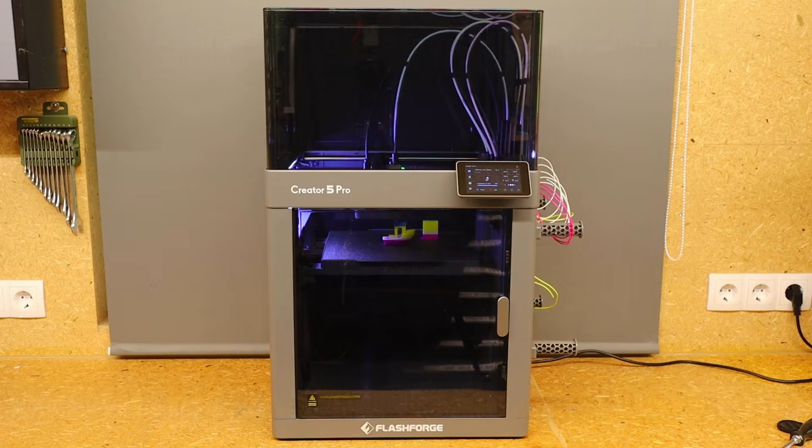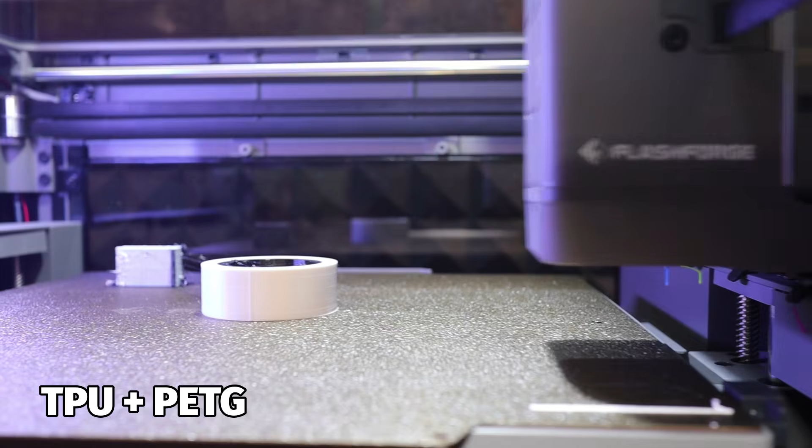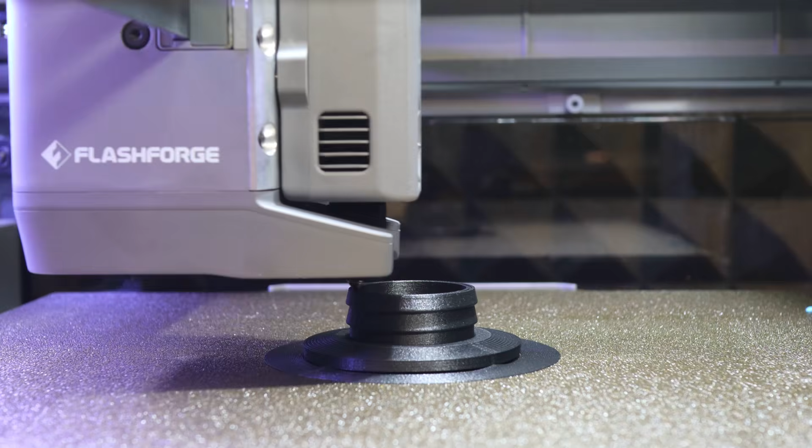The Flashforge Creator 5 Pro offers the perfect conditions for printing challenging technical filaments like nylon or polycarbonate. Its actively heated build chamber, high temperatures, and built-in filtration system, combined with a 4-way tool changer, make it extremely interesting for demanding materials. In this video, I will extensively test if that actually works well in practice for an $849 printer.

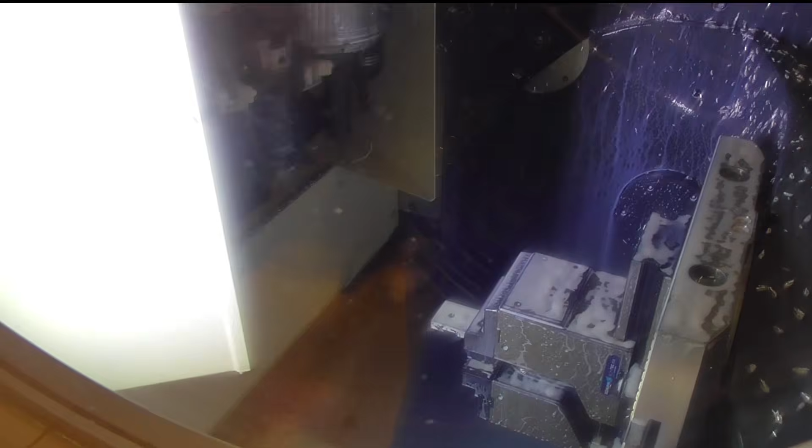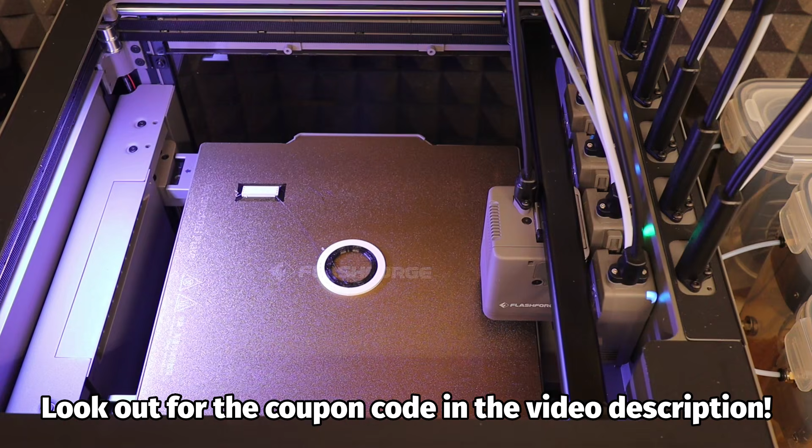I'm a professional CNC technician and I have been using 3D printing since it first appeared on the market. Flashforge saw my videos on developing the open source thermoacoustic Stirling engine. Since I need a tool changer with several nozzles for multi-material printing of engine components and support structures, I'm very glad Flashforge provided me with their new Creator 5 Pro. I'm sharing my honest results here, and Flashforge has no influence over this video.

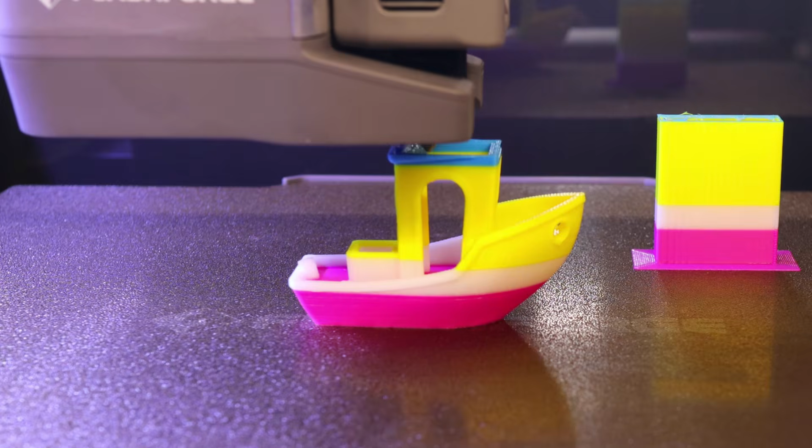Setup and initial startup were very quick and easy. The first multicolor benchy printed with the included PLA immediately showed the best print quality I've ever seen. To be fair, I've never owned a printer in this price range before.

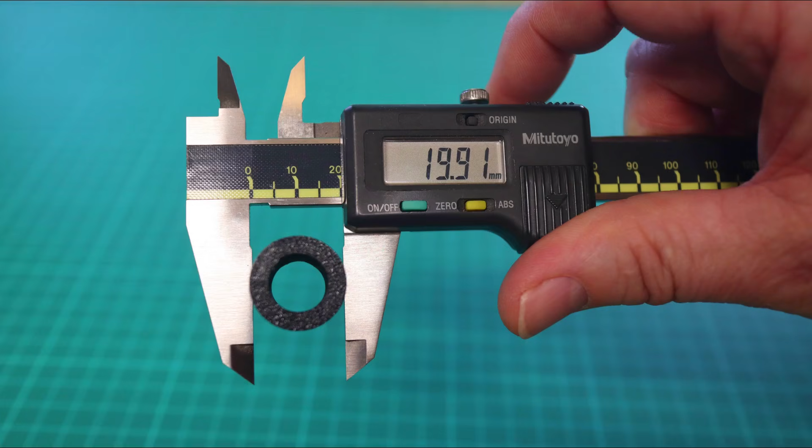Next, I tested printing a 1/4-inch pipe thread cylinder without support structures using PETG. The part turned out great on the first try, without any prior calibration or tweaking. I really wanted to test what the printer can deliver straight out of the box. The dimensional accuracy and print quality are excellent. The thread fits precisely and screws onto a threaded fitting without play and without needing post-processing.

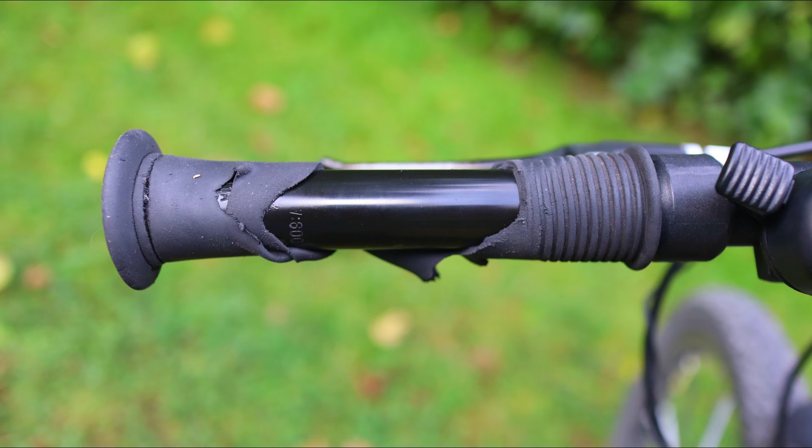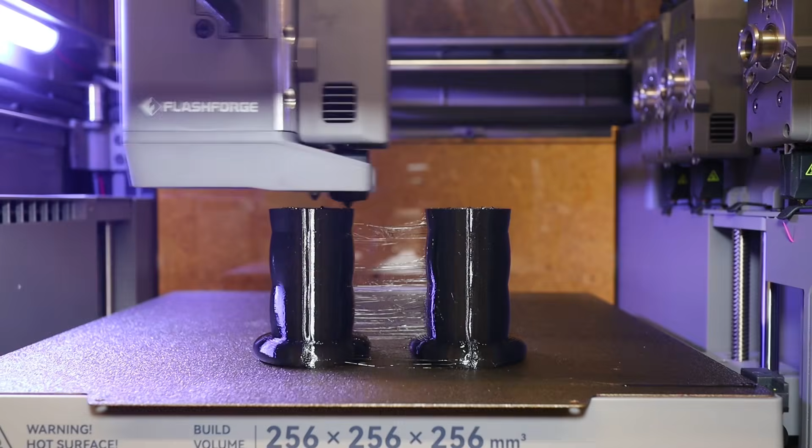My daughter needs new handlebar grips. I designed the grips in FreeCAD and printed them in TPU. The soft TPU feeds into the extruder smoothly, and apart from a little stringing, which is normal for this material, the print ran completely without issues. I think the result speaks for itself, and my daughter is happy.

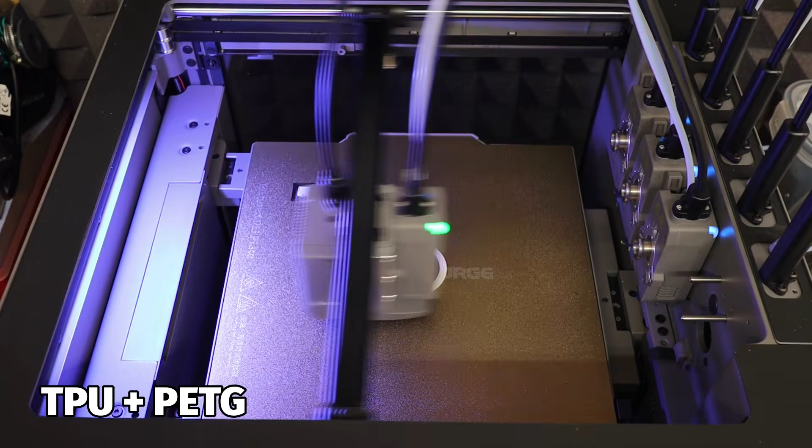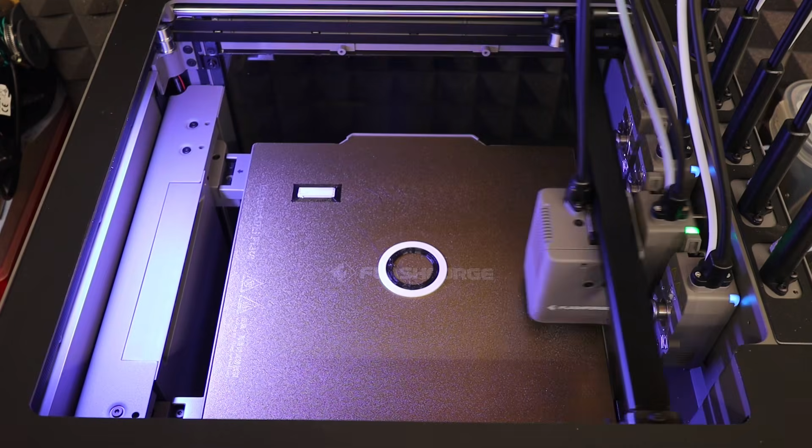Next, I tried my first multi-material print. For my high-pressure engine components, TPU is very interesting because its layer adhesion is extremely strong. However, its flexibility isn't suitable for my engine, so stiffening it with PETG would be optimal. I printed 2 nested tubes, PETG on the outside and TPU on the inside.

The tool change is very fast and reliable. It completely eliminates the material waste typical of AMS systems, and tool changes barely add to the total print time. Again, there was typical stringing, but otherwise the print went smoothly and the bond is rock solid. Even with a lot of force, I can't separate the 2 parts. I'm definitely going to produce a few engine components with this material combination and run high pressure tests.

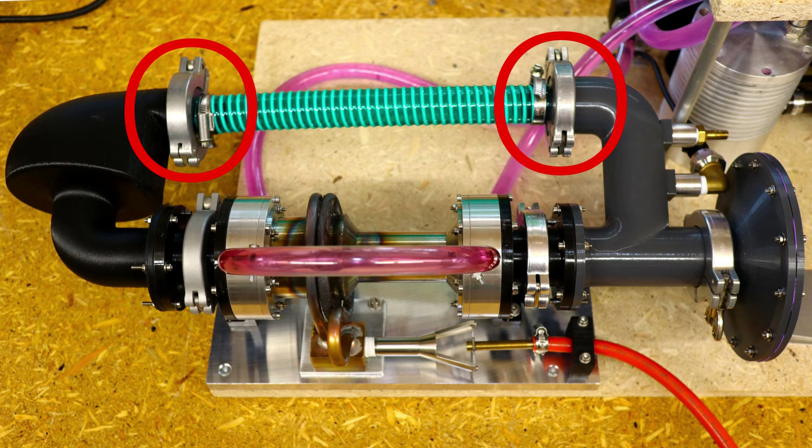My PETG KF40 clamp flange hose connectors aren't strong enough, so now I'm printing them out of PA12CF. The print turns out great. The part looks fantastic and warping was minimal. Especially with nylon, I used to have major warping issues that often forced me to abort prints.

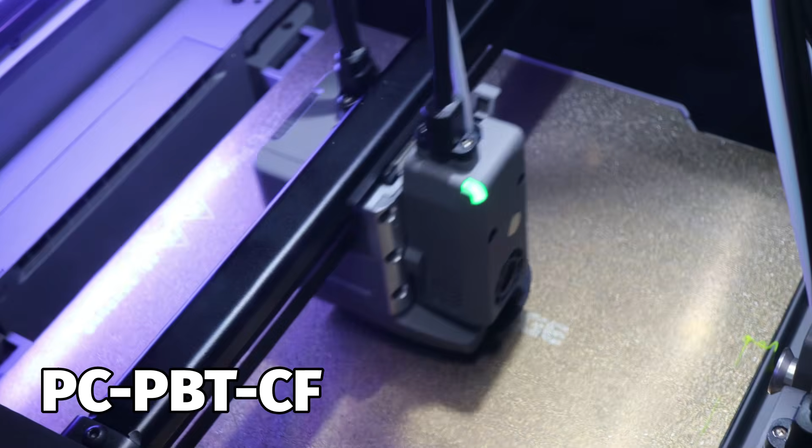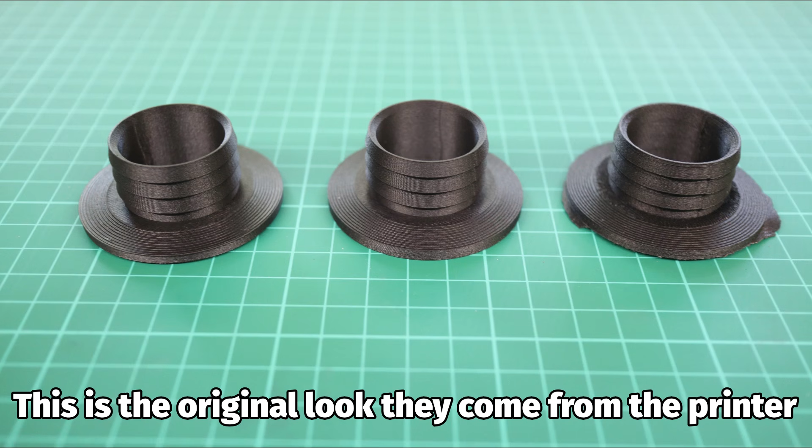The same part printed in PC-PBT-CF yields even better results. And with ASA-CF, the print also turns out very clean and runs completely without trouble. These filaments are high strength and can handle the demanding requirements inside the engine. PC-PBT-CF in particular is incredibly tough. In terms of stiffness, you could almost compare it to aluminium.

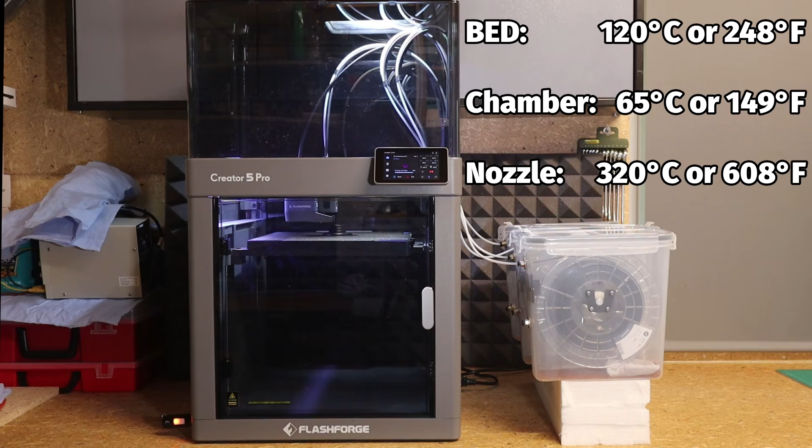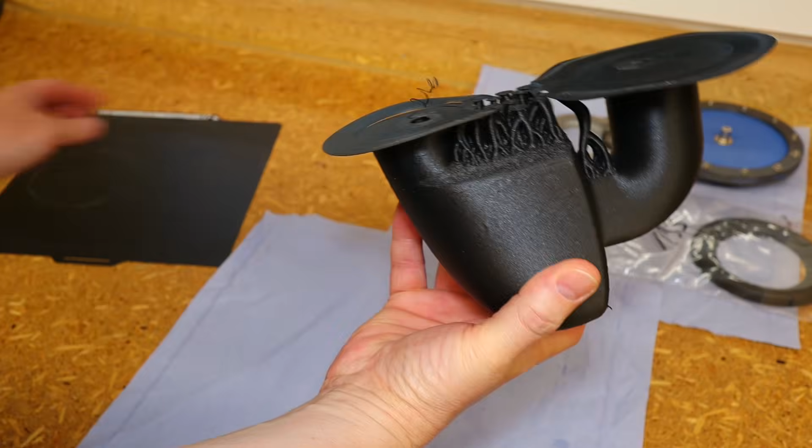Thanks to the high bed temperature of 120 degrees Celsius, the actively heated build chamber at 65 degrees, and up to 320 degrees at the nozzle, the warping problems seem to be solved. After sealing, the parts are permanently high strength and pressure tight. Removing support structures with these materials is a real pain, so I'm looking forward to multi-material tests using easy-to-remove support filaments.

So far, I'm more than satisfied with the Flashforge Creator 5 Pro. It delivers excellent results out of the box with all the materials I tested, even the challenging ones. So I'm going to start designing and printing a lot of engine components now. I will report on that in the next video.